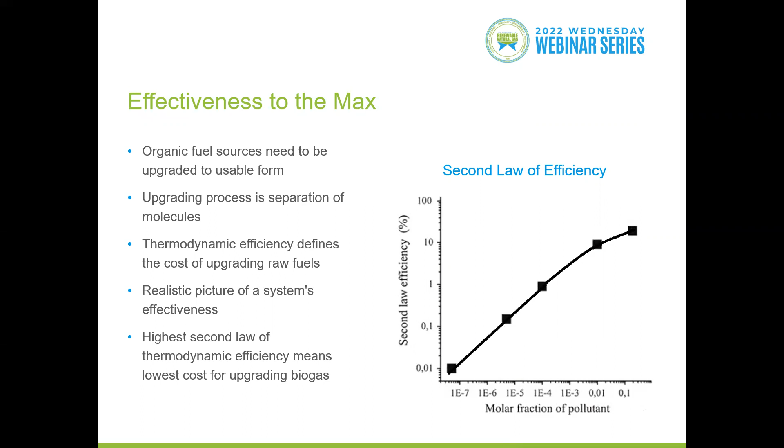And when you go higher and higher than that, then it becomes difficult again. The reason 100% pollutant doesn't mean 100% efficiency is because now you have to fight the other end of the curve, and now it's very difficult to remove very small quantities and purify the methane. So that's why this graph is really important, to show everybody that the reason most of these processes are expensive is simply because they're not efficient. That's all it is. So on the next one, I'm talking a little bit more about what the upgrading process is and the methods that have been used.

So if you look at a process for separating or upgrading biogas, the first thing you need to consider is what your feedstock is and what product you need. Those are the two boundary conditions you need to understand. For a fully saturated or fully wet biogas, basically 6 to 12% of the biogas is water by weight. And if you want to remove or separate the constituents of the biogas, you first need to drop that water, the drying step. Then there is a nasty component there, H2S, which is quite dangerous, at a level of about 1000 ppm on average, so that needs to be removed.

Normally, the biogas is at ambient pressure, and about half and half is carbon dioxide and methane, with all the other impurities that I just mentioned, water and H2S. And the off-takers normally would say, well, I need certain purity for methane because, first of all, the renewable natural gas, which is the purified or upgraded biogas, has to meet the Wobbe index or basically the thermal value. And that relates directly to concentration of CH4.

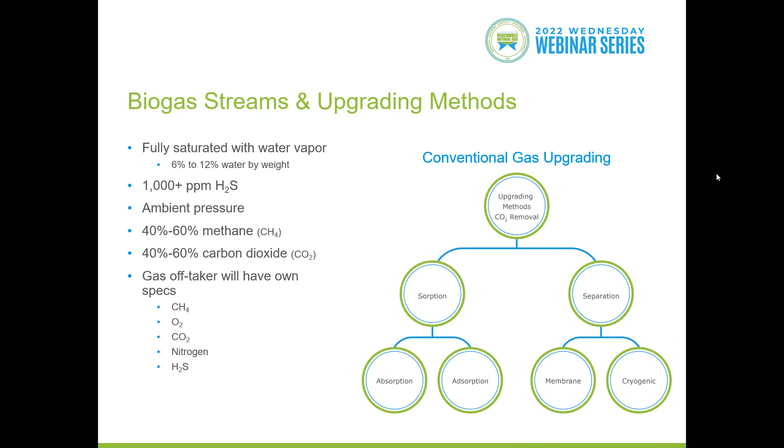But then on the sorption side, you're talking about either adsorption or absorption. This is when you're dealing with an interaction between a species, a surface or a functional group or another molecule with the gas component that you want to remove. So that's why you can distinguish the two. One is physical, the other one is more into a reaction or chemical process. So now I'm going to go through each of these different technologies or methods on the next slide.

So the first one we talk about in physical separation is the solvent separation. And this is the easiest one, I would say, from a process point of view. So it's based on solubility of carbon dioxide. So if you have water, if you have PEG, basically you can dissolve carbon dioxide. And all you have to do is cool it down and then regenerate it again by heating it up. So it's a two-stage process.

And in order to get the highest amount of solution of the carbon dioxide, you need to increase the pressure. You know, when you open a soda can, there's this pop sound because it's pressurized, because you need to push all that carbon dioxide in. And also when you keep your can of soda cold, it actually keeps more carbon dioxide in. Same way here. So you have high pressure, low temperature, you get as much carbon dioxide in as possible. And then later on in a stripper column, you take that saturated solution and heat it up to release carbon dioxide. So very simple process.

And this process has a good side, which is, first of all, you remove CO2, but also you can remove H2S, depending on what kind of solvent you use, of course, and it is effective in terms of meeting the RNG specification, as long as you don't have nitrogen or you're not dealing with landfill gas. Also, one good part of this process is that you do not need to dry your biogas down to a very low dew point because you're actually using water here.

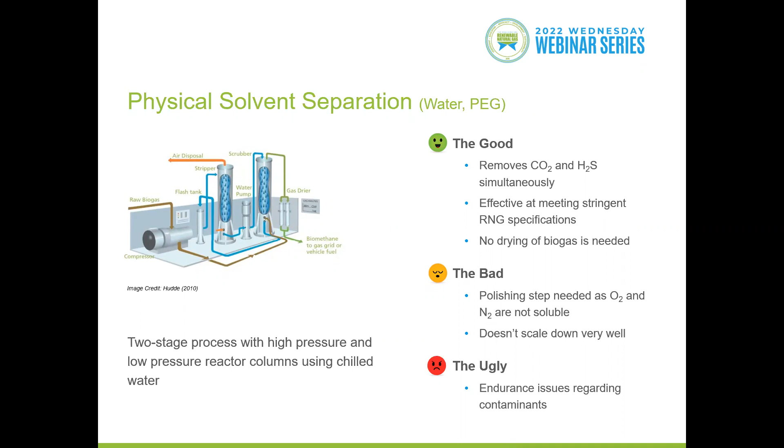And the next one, as you can see, is that people kind of walked away from this liquid process and looked more at membrane type separation. So membranes have been around for many years and have been used in many industrial applications. But the polymeric membranes give you this great CO2 selectivity over methane, so you can separate by permeating the carbon dioxide through the membrane wall. So these are very fine tubes.

They look like very fine tubes bundled together, and when you pass the biogas through under pressure, the carbon dioxide diffuses through the membrane wall, gets gathered outside and then gets released from the shell side. And then your methane, the clean methane, goes through the system. So it's simple, no moving parts. You don't need to worry about corrosion or erosion. You get good methane recovery.

The membranes initially weren't that great. Now, with the polymeric membranes, they tailor it exactly to the right pore size, so they get quite good methane recovery. But on the bad side, the membranes are fragile and can easily get damaged, although the early versions got damaged a lot easier; they have been improved quite a lot. But then the performance decreases over time.

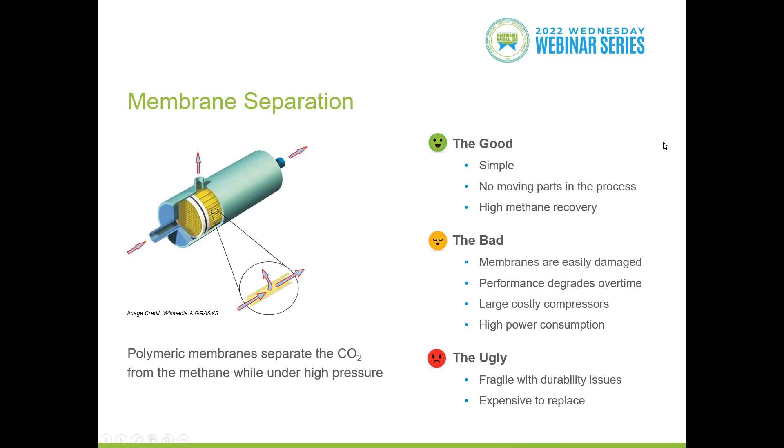Now, on the other side, you're dealing with something else, which is chemical solution. To get that carbon dioxide out, in the previous slides we relied on the solubility of carbon dioxide, or next, on diffusion and high pressure to push the carbon dioxide through the pores. Now you're talking about a totally different animal, and this is chemistry. There are chemical solvents that react with the carbon dioxide. You don't need very high pressure or very low temperatures. They are designed for the removal of carbon dioxide.

The process of sour gas treatment has been around for many years. Upstream oil and gas has used amines for sour gas treatment for many, many years. Some of the natural gas in your pipeline actually comes from a similar process in the upstream oil and gas industry to clean up sour gas. The same technology has been adapted for biogas in this case. So you're using a chemical solvent, and that's important. It means that you have a chemical plant on your farm.

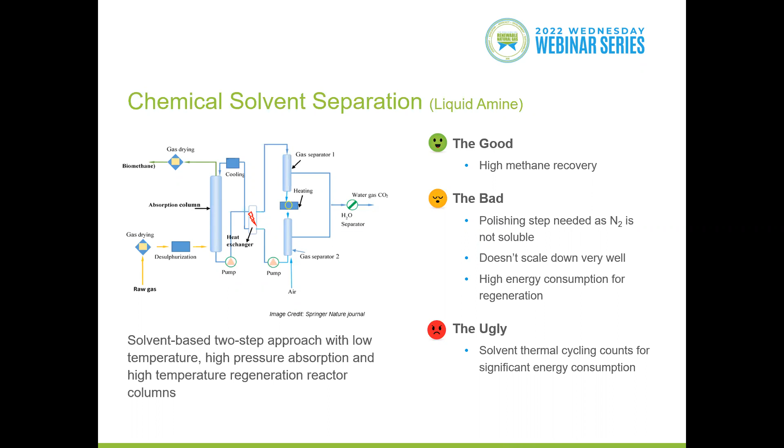So if you take this process and then say, well, what is the best work between these two? You got physical there, all the way when we talk about thermodynamics, solvent process and membrane process, and then you got the chemical all the way on the other end of the spectrum, which is amine groups. So what is the work between the two? Well, the work between the two is this process of pressure swing that we have in the next slide.

Yes. So the pressure swing process is a cyclic process and it's a batch process. Like the other process that I mentioned, you got an inventory of a material that has the pore size distribution and also the affinity or selectivity toward carbon dioxide. So a little bit of both of the chemical solvent and membranes is in this solution, down into physics level.

So you got a packed bed full of adsorbent, and that adsorbent could be an amorphous adsorbent, could be a zeolitic adsorbent, or could be a molecular gate, and so there are different options out there. And these options give you the tools you need in your toolbox to exactly tailor-make your process for your feed and your desired product.

So the other ones are kind of solid fixed membranes: you get what you're gonna get, it comes as a membrane, you go and buy it. But when it comes to the PSA, you can actually tailor-make it. You can have different layers of adsorbent inside of these vessels, and you can have different types of cycle, trade-off between recovery and purity, a lot more engineering involved, of course, but then you can optimize your solution.

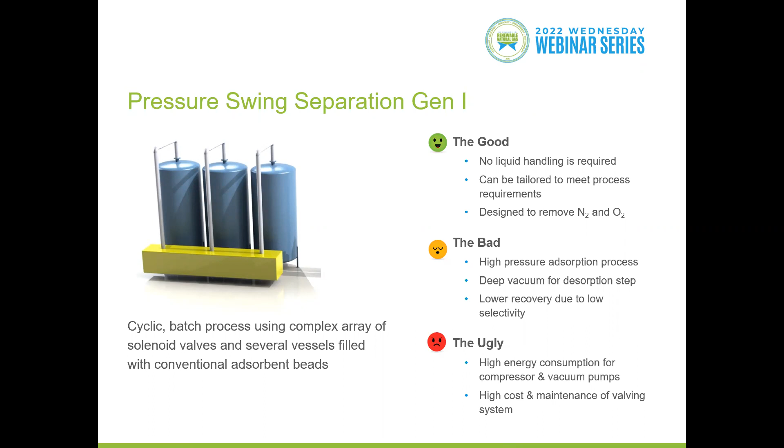But on the other side, these valves and this number of vessels are going to increase your capital cost and some operating costs due to the maintenance of the valves. So how do we solve this problem? Back in early 2000, we came up with the rotary valve when I was working at QuestAir.

And the rotary valve is basically a template for the cycle, aside from that it's rotating. First of all, when you're talking about a cyclic process, the best cyclic process is a circle. You go around, so you rotate. When you put the valves in array form, click, click, click, like the last slide you saw, the valves go through, and then you have to restart, go back to the beginning of the line again. Well, what we figured out, you just put it in a circle, okay?

That simplifies. And the second thing is that all those valves can actually be simplified into two valves, one on the light end, one on the heavy end. The light end valve was dealing with the product, the clean gas, the equalizations, and the heavy valve was dealing with the feed and exhaust. So two valves replace over 50 solenoid valves, and then you can increase your number of vessels in order to gain as much recovery as possible.

So the good part of it, no liquid handling, same as previous, and you don't deal with chemicals. And you can tailor it, same as the previous one. You can design for removing nitrogen and oxygen, same as the other pressure swing adsorption. But what is added here is that now you have rotary valves that reduce the capital costs and operating costs. So it gives you the capability to increase your recovery by adding number of beds without breaking the bank for the cost of the solenoid arrays and controls. The ugly side, the same as before, high energy consumption.

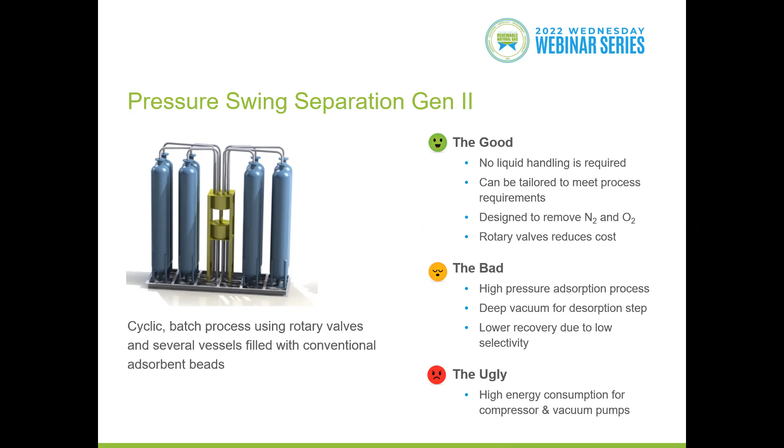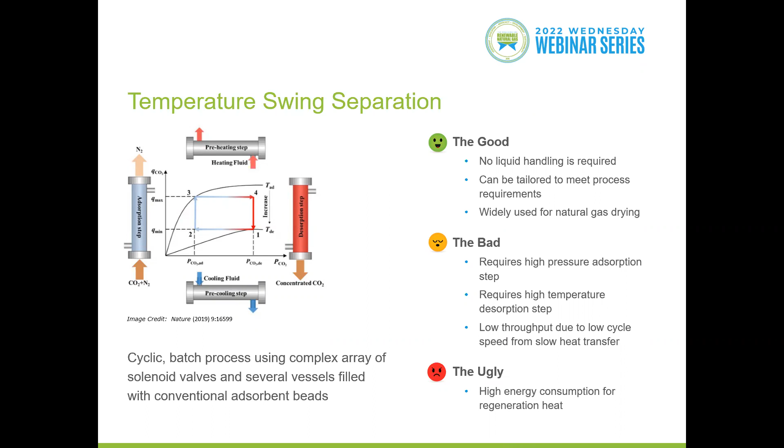So how can we now fix the problem, combining the previous processes with this process? What we figured out is that to get rid of the high energy demand for pressure and the energy demand for regeneration, the better solution would be combining the adsorption process with a process or material that has higher affinity or higher capacity at low pressures and requires lower energy for regeneration. So on the next slide we show how this is done. The first application for this is the Veloxotherm process. I'm the inventor of the process.

The first application we chose was carbon capture. And carbon capture because it's a process that deals with all the problems that you saw here and we have today with renewable natural gas. You want to upgrade the gas, clean it up. In this case, you wanted to get the CO2 out. In our case, we want to get the CO2 out also, but we want to have fuel. In the flue gas case, you didn't have to have a fuel, you just need to remove the CO2. But the problems are the same, which is do it at lowest energy, lowest cost.

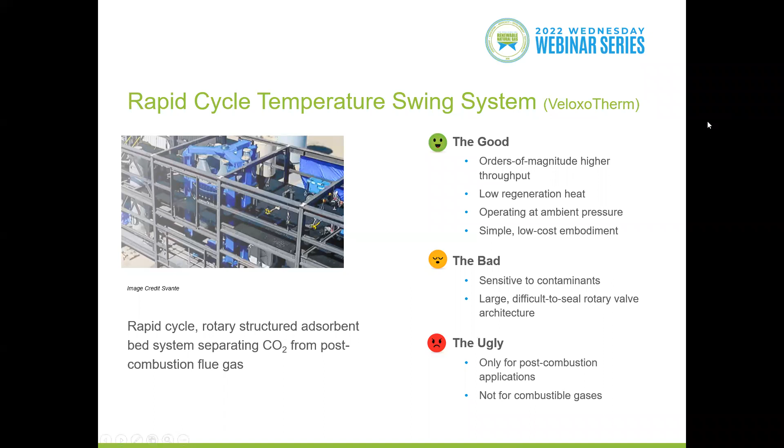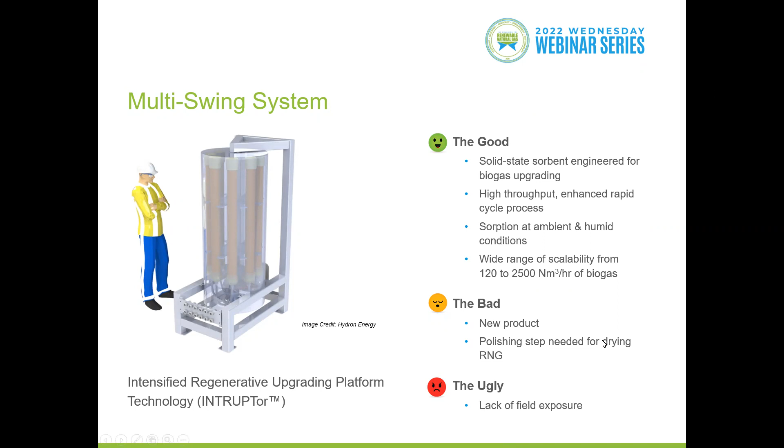So now I want to talk about overall what we just covered in this presentation. Thanks for your patience so far. So it's important to look at all these processes. There's no best one out there or worst one out there. There's always a best solution for the problem that you have, but that doesn't mean that is the best solution for somebody else's problem. So it depends on what you have, what your boundary conditions are. You need to figure out what kind of process you need for your upgrading.

So the contributing factors for this would be, what's your biogas source? Is it coming from an anaerobic digester? Is it coming from landfill? Is it coming from wastewater treatment plants? Depending on what source you have, you need to figure out what kind of industry you're in, what kind of contaminants you're dealing with. If you're on the farm, most of the cases that I know, like amines and farms, at least in the past, it wasn't that. It's a chemical plant, so you don't want to have it on your farm. But things are changing. They got a lot better in terms of their safety.

But the other thing that you need to consider, of course, is the cost model. So you need to see how long you need to amortize the project, over what period of time, what's going to be your capital cost versus your operating costs. Some projects can absorb a lot of costs at the beginning, so you go with a higher capital option with a lower operating cost. So you need to figure out which is the best in terms of your cost model.